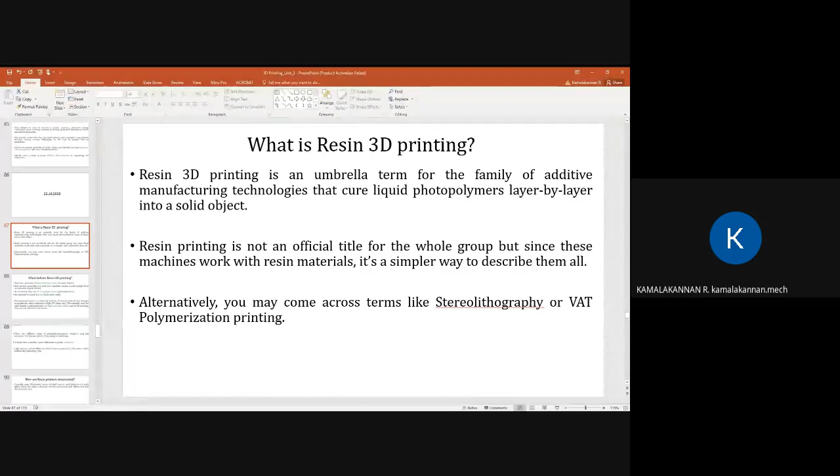So, boys, today our class is about resin. We have seen what materials we are using in 3D printers and also how those materials are prepared for making a product in 3D printing. So far, material-wise, we have seen polymers, we have seen metals, non-metal in the form of resin. Next, we have seen ceramics. So these are the things we have seen

in preparation of metal and preparation of material powders in the form of polymers and metals. The third thing is resin, which will come under, I'm sorry, non-metal. Resin is one of the important types of material used in 3D printing because there are many companies available that prefer making 3D printers only with resin.

It cannot be used even for polymers or other technologies. There are companies which specially make 3D printers only for resin. So it shows how much resin plays a vital role in 3D printing material. That is why I have planned a class for resin today. We have seen resin a few days back, and I have given a few points, but today we are going to see only about resin.

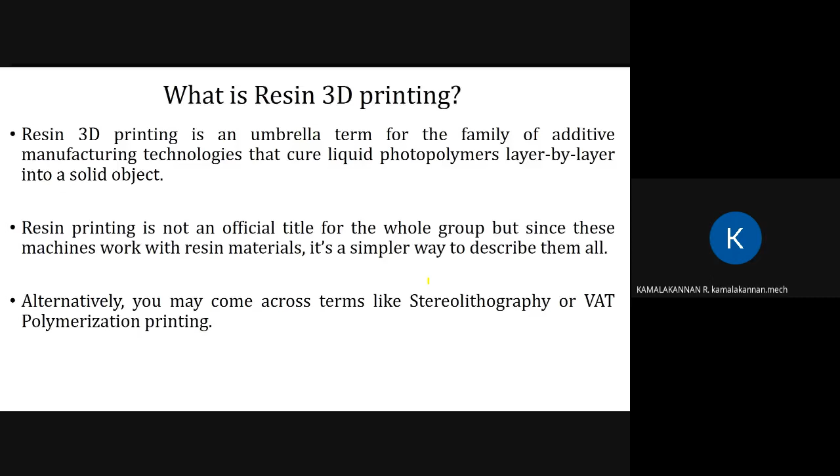We use the word vat here because of the polymer material. This type of polymer material is stored in a vat. That is why they call it vat polymerization. What defines resin 3D printing? When will we call it resin 3D printing? Of course, when we use resin for making a product, it will be called resin 3D printing. Then how can we define that?

The thing is, they use the principle of photopolymerization to create objects. It shows that there are other types of polymers which you can make with other techniques to form a solid. Here in resin, we use photopolymerization. Here you use light-sensitive material, so it is called photopolymerization.

Okay, guys. In other types of 3D printing machines, we use the polymerization method, but that will be in the form of heat or pressure or both. But here we are using light. Hence, when you have the principle of photopolymerization, it is also called resin 3D printing. And the next one is they operate according to the code. This is a general way of explanation.

And as a material, they use UV or daylight resins. So for photopolymerization to happen, we have to use UV or laser, or else daylight, sunlight, might be used for photopolymerization. Then the material is stored in a vat, that is nothing but a bath or resin tank.

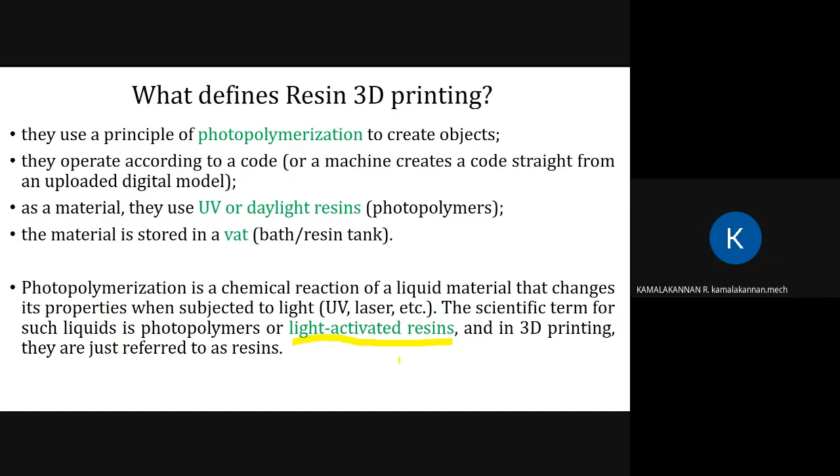See, officially it will be called photopolymers. Sometimes it is also called light-activated resins. That is the actual term, a technical term. It shows that it will activate under a light. Why it activates under light is, when you have a liquid resin and a different wavelength of light passes over it, it starts polymerization. That is why it is called photopolymerization.

In general, it will be called light sensitive material, light-activated resins. Because resin is a general word. There are many types of resins, from natural to synthetic. Here, what we are using is light-activated resin.

This resin has many types. Each resin will not get solidified in a single light. Some resins will get solidified or photopolymerized in UV light. Some will photopolymerize in laser. Some in daylight, that is sunlight. Some even in LCD projector light, which is enough to start polymerization. So it depends upon the type.

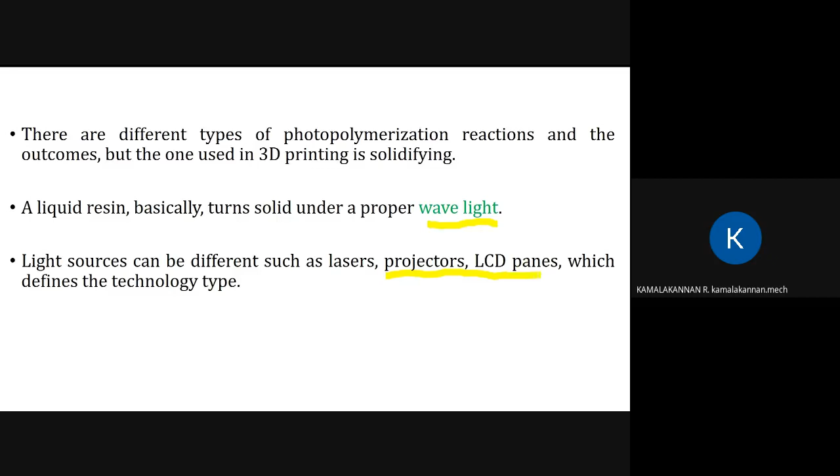Next one, how are resin printers constructed? As we have seen what photopolymerization is and how we define a 3D printer, the same way, how are resin printers constructed. The major parts of resin printers are the light source and build platform. The build platform will have a top-down approach or bottom-up approach. Both cannot happen in a single construction. Whichever you want, you can prefer. It depends upon the type of product you are going to make.

It also has a resin tank to store it, which is nothing but a vat. It will have mirrors to focus the laser light or UV light towards the area wherever we need.

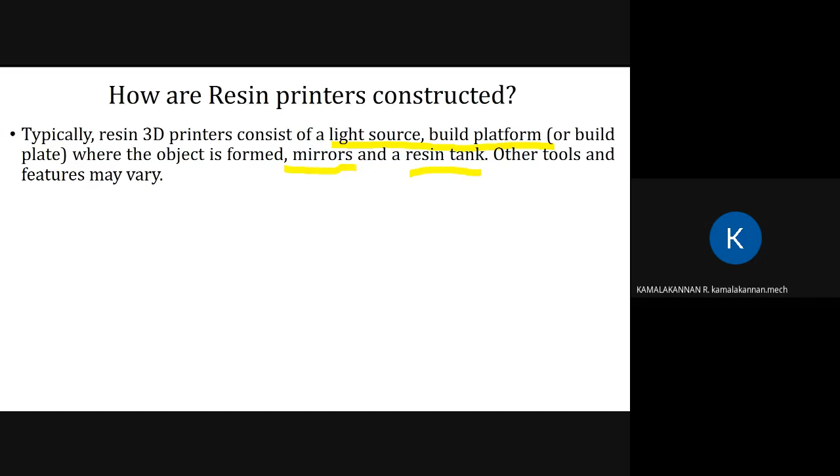Next one is how resin printers form an object. In a simple way, we can say it is by the process, and the process is nothing but photopolymerization. Normally, we will use the upside down approach, because it's tough to control the bottom to top approach when you compare with top to bottom, so companies always prefer upside down. We can control it easily and we can go for a huge product. When you go for a bottom to top approach, you need strong or more support. To reduce that, we can go for upside down.

Upside down is more common for desktop machines because it's easier to operate and fabricate without losing out on quality. The quality differs because when you have many supports in the bottom to top approach, you need proper finishing. If proper finishing does not happen, the quality of the product may vary. That is why they have indicated it here.

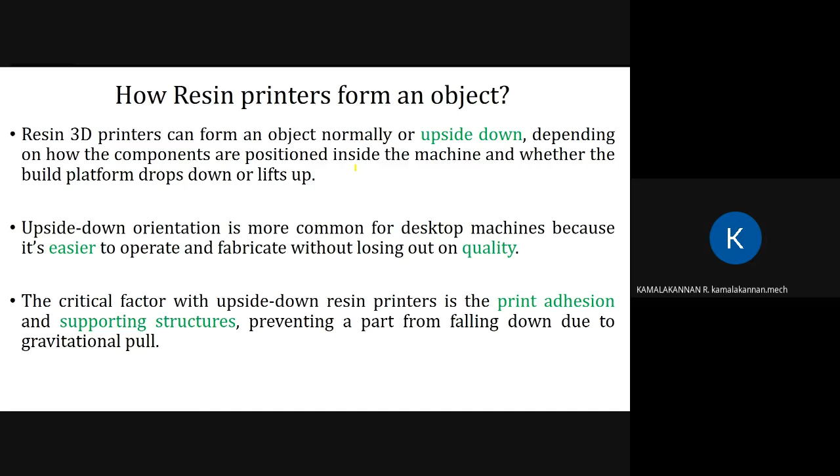Next one is how does resin 3D printing work? The working is, as we studied in the second unit, the common approach. In the vat, the photo resin will be filled. Then UV light will pass through the required area, and the layer will get solidified. After that, the build platform will move downwards. That is what is called upside down. The downward movement depends upon the layer thickness. Then the same process will repeat. Laser light or UV will pass over the area which needs to be solidified, and it will be repeated. Finally we will get the resin 3D product.

So here we have indicated a word called toxic. Why? Because there are also types which will be in toxic conditions. So try to avoid these types of materials, or else the product should be made in a properly closed condition or with preventive care.

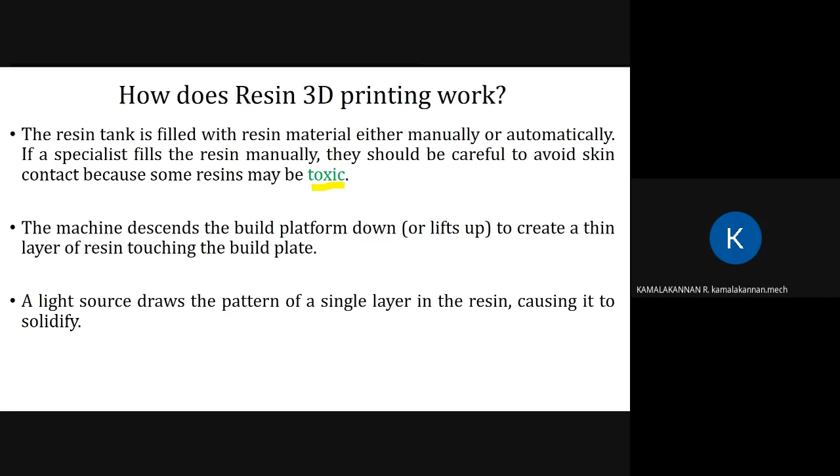So in general, what types of post processing can we do to have a proper 3D print of resin? The first one is washing. Washing is nothing but, as we have seen, there are some resins that can be washed away with ordinary water, and some with chemicals like limonene. So it depends upon the type of polymers we are using, that is, the photopolymer we are using.

It is needed to remove uncured resins left over from a print. In order to do so, prints are put into alcohol, water, or at least left to dry on some paper towel. So washing is nothing but removing the uncured resins. Even though we are curing with the help of light, there might be small areas which are left uncured. They have to be washed away for proper post processing. So this will be put in water, alcohol, limonene, or any other chemical to wash away unwanted or uncured resins.

Next one is UV curing. UV curing is nothing but, after the washing is over, it will be kept in UV for further cure, because the machine might have done the work very fast. There might not be a full curing. The material might be considered as a raw material. To have good strength and for using that product in a live area, we have to do proper curing. So you will have a UV curing a second time after your building. This will be a common process in resin. Sometimes the material might cure too much when you expose it directly to sunlight. To avoid such, we will use UV curing.

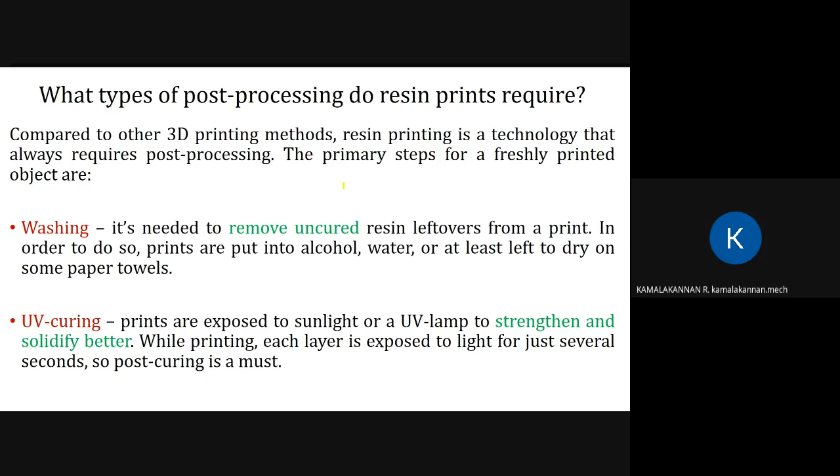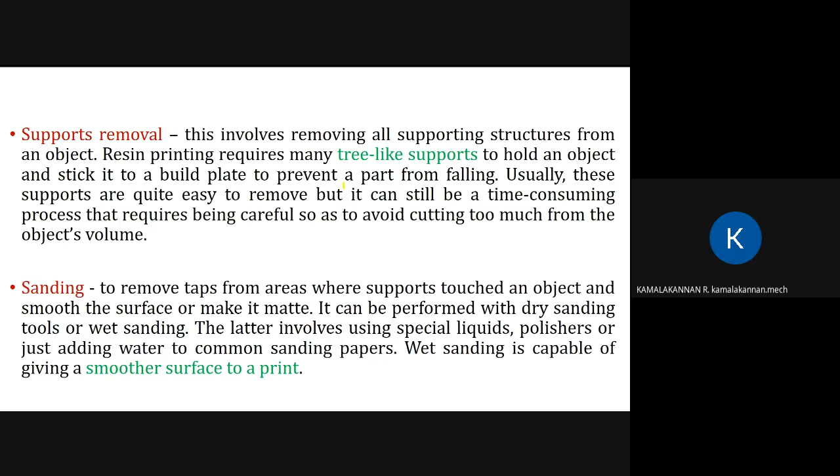Next one is support removal. Yes, of course, we need to remove the supports. Depending upon the product, the size of support will vary. It will usually not be a single stem-like structure. It will be a tree-like structure, so it has to be removed properly. The next one is sanding. Sanding is nothing but, just consider it as sandpaper. Once you remove the supports, there will be a print left in the area where the supports were. So it will look awkward. To avoid such, we will use a fine sandpaper to rub over the surface to have a good smooth finish.

Next one is patching escape holes. This is especially for a hollow product. When you make a hollow product, inside that there will be liquid resin. To let that escape, we should have escape holes. Finally, once it escapes, we have to patch that hole. That is called patching escape holes. We will use some photopolymer itself to patch the escape hole.

Next one is finishing. Finishing means the overall finish. Overall, if you are seeing any imperfection, you have to fix it. It might be you have to do sanding, or proper curing, or a wash away, whatever it may be. Overall, if you want, you may repeat.

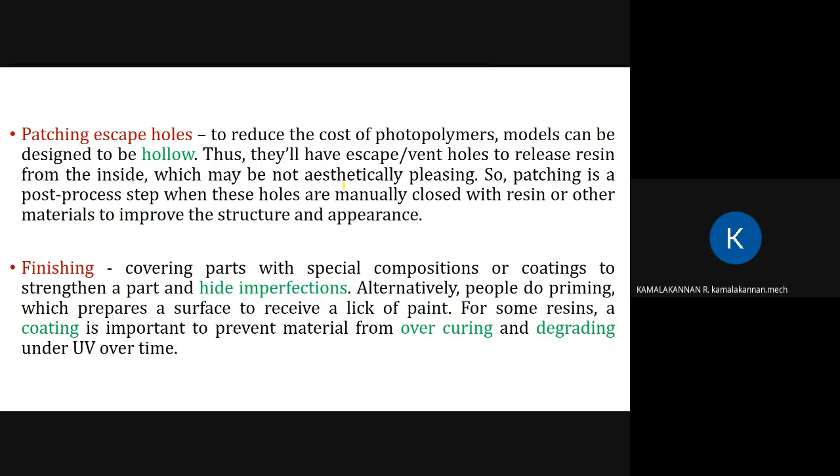An important thing you have to note down is that for some resins, a coating is necessary once the above work is over in post processing. That is, once washing, UV curing, support removal, and sanding are over, we have to do a finishing called coating. A coating is nothing but a material which will prevent the photo material from over curing and degrading under sunlight or UV over a certain period of time. That is why finishing is necessary.

Then painting: there are many colors available, many compositions available. You can choose which color you want. It is for aesthetics. The next one is polishing. Polishing is done to have a very smooth and clear surface. It will give you a glossy finish, a surface with a highly reflective finish, which will look very attractive. That is why this post processing is done in resin. These are some of the post processing methods.

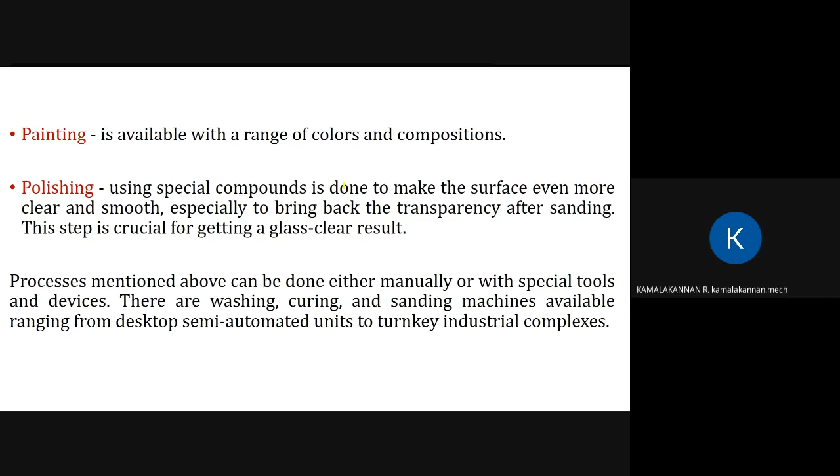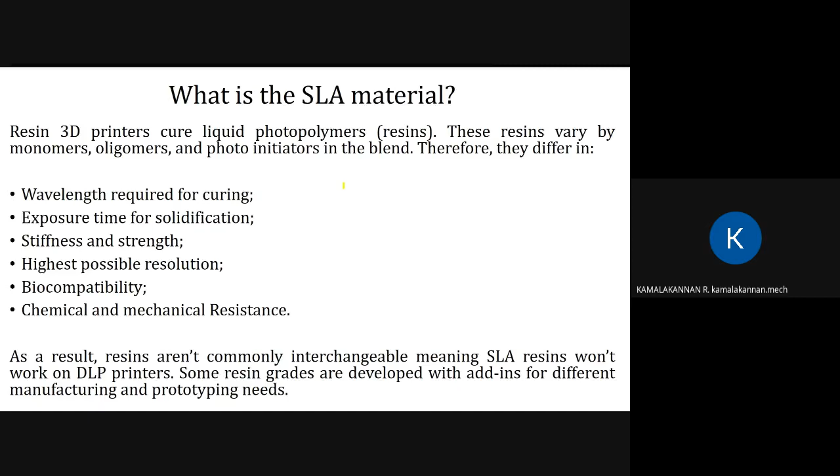Next one, what is SLA material? Why we call it SLA material is that in SLA, stereolithography, the only material we use is resin. That is why we call it SLA material.

You will see some common UV resin types in 3D printing. First one is standard resin. We will call it as resin. It's a common one. This resin uses UV light to get photopolymerized. The surface structure might look like a rubbery texture, but actually it is very strong when compared to other types of resin.

And this type of standard resin is most sensitive to UV light, so the first time itself you have to cure properly and do proper post-processing, or else overcured areas will form while in use. To avoid such, you have to do a proper coating.

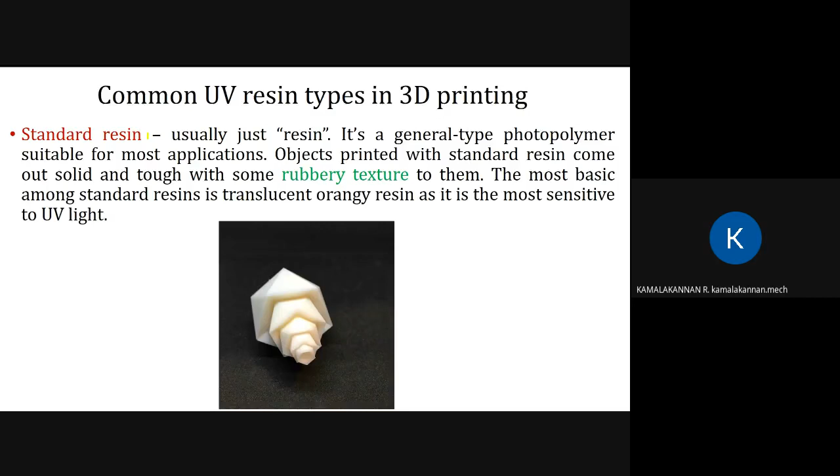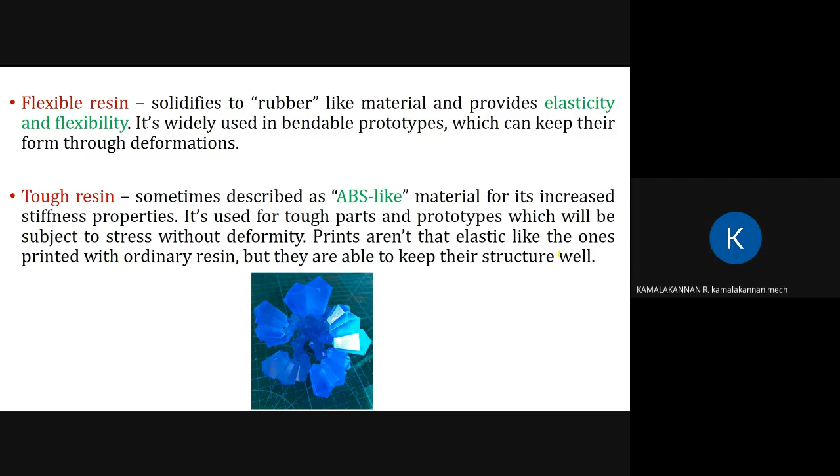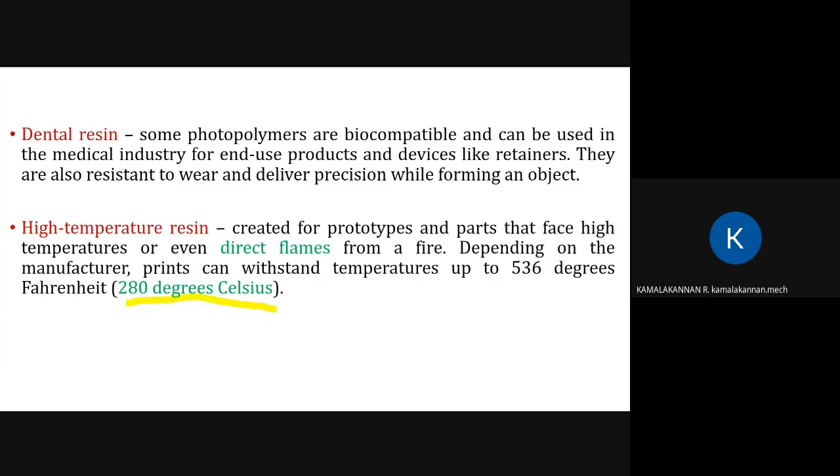Next one is castable resin. Castable means it is for casting purposes, especially investment casting. As you know, investment casting is done with the help of wax to achieve small products with very fine finishing. Similarly, castable resins are used, and the same casting concept can be used here.

Ceramic resins are also available. This is done by adding ceramic to the resin. This type of resin will give you more stability and rigidity, and it can withstand even high temperatures. That is why we use ceramic resin. But the thing is, because of high rigidity, it will break easily, so you have to be careful when using ceramic resin.

Next one is clear resin. Clear resin is nothing but very transparent in condition, like glass. It is very transparent, easy to use, and even in some dark conditions it can behave like a very transparent condition.

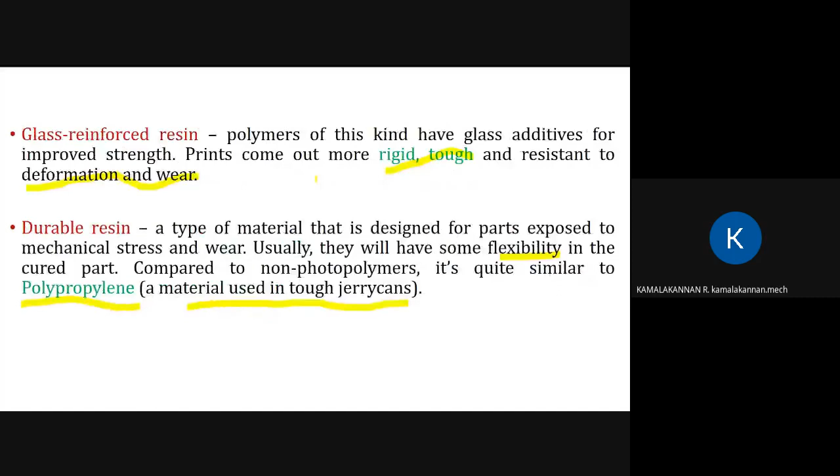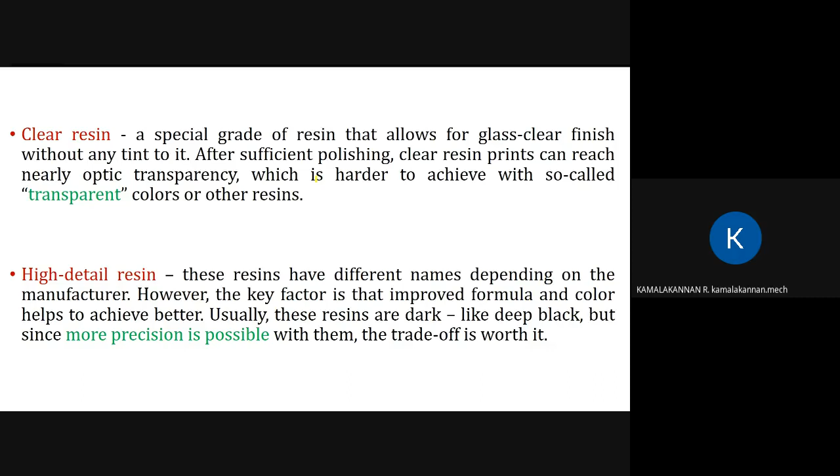Next, how many resins have we seen? 1, 2, 3, 4, 5, 6, 7, 8, 9, 10, 11, 12 resins we have seen. In the earlier class, while taking resin, I showed only 7 resins, but today I told you about 12 resins. So these are the resins, not more than this. Only 12 resins are mostly used in 3D printers. Even though some resins are shown here, their usage is much less compared to other types of resin because of their cost and the condition of how we use them. So it depends upon the situation.

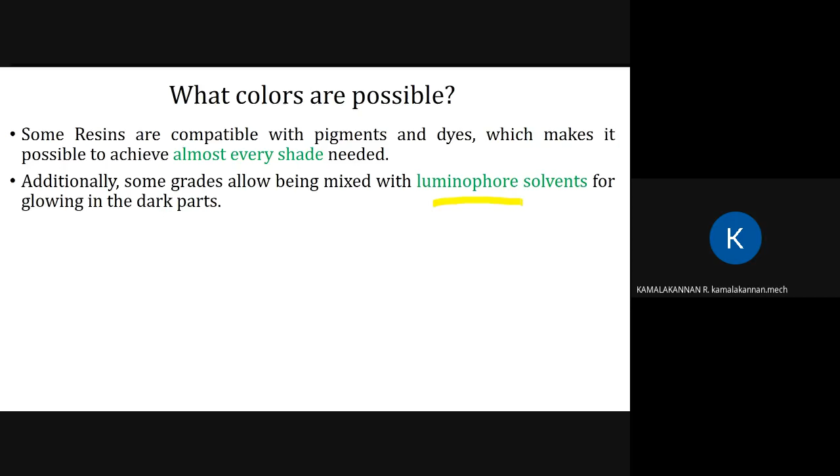Then what colors are available? Almost all colors are available. Any color is possible in resin. Even luminophore solvents are also added, so you can get a luminous color also achieved. That is nothing but it will glow even in the dark. We generally call it radium. This is also possible when you add luminophore solvents.

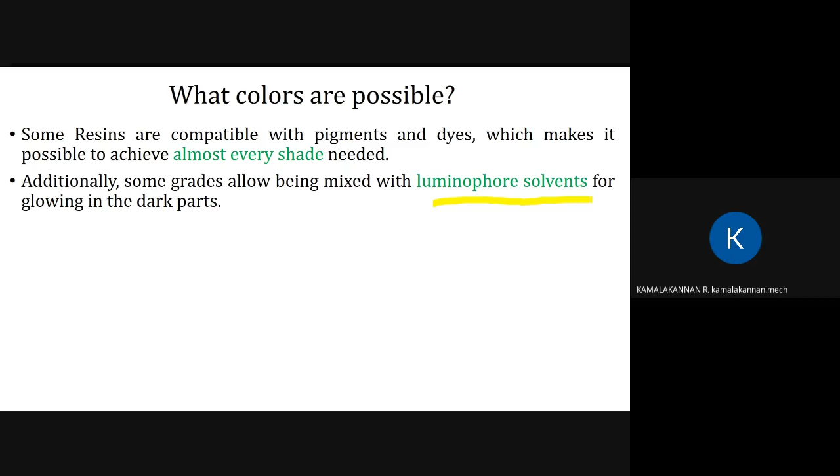What are the advantages and limitations of resin 3D printing? We have to know the advantages of using resin. It is liquid in condition, after it gets solidified it becomes solid, so that you can get very high detail compared to any other type of material. So when you choose resin for making a product, it will have very good detail. You will have a very smooth surface finish.

Third one is wide variety of materials. Yes, when you take a polymer or a metal, you have a wide variety of materials available, you have a choice. But the thing is they will have similar conditions, similar characteristics. Here, the resins range from very smooth to very strong and transparent, even at very high temperature we can use them. That is how much variety we have in resin, and that is why it is considered one of the biggest advantages of using resin.

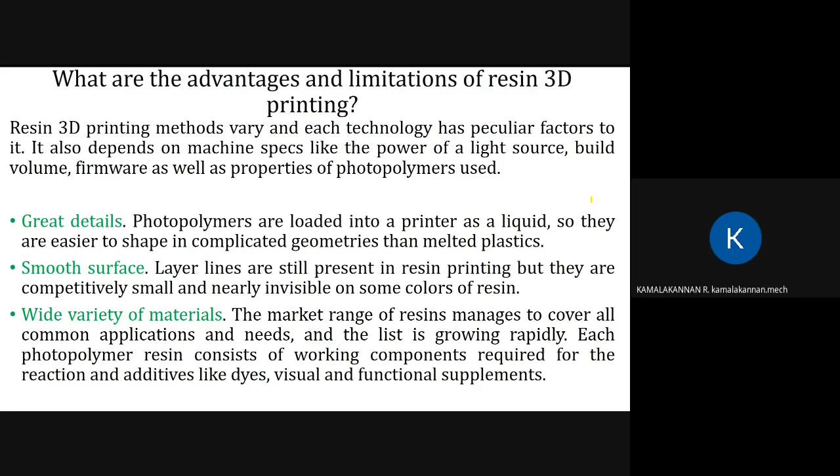Support doesn't affect the surface that much. Yes, of course, when you have support, in resin you have to use more support, but that support can be easily removed. When you have more support in metal or other types, it's tough to remove, you need to spend more effort. When you use resin, it is easy to remove, so even after removal of the support, the surface doesn't get affected that much because it's easy to rub and easy to polish. That is why it doesn't ruin the surface that much.

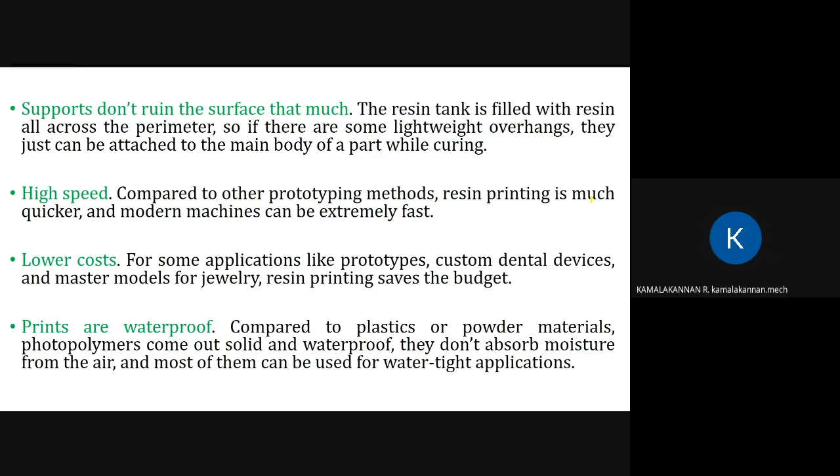Using this material, we can make it high speed compared to metal. It is low cost. The prints are waterproof. Yes, since it is a polymer, it is also waterproof. When you take metal, not all metals are waterproof, some materials will get affected by water. That is why we say the prints are waterproof.

Of course, it will have disadvantages like other materials. Many machines have a small build volume. By using this resin, we cannot make a huge product. Its withstanding pressure and temperature ability is not like metals. So this type of resin is used only for making small products, hence the machine will be smaller in condition.

Design limits and requirements. Since these materials are rigid in condition, when you compare with metals, it's not the same as metal. So to achieve something nearer, you need to have more support. There should be a proper design to achieve this.

Engraved details should be at least 0.4 mm wide and thick. It is not the same as metal - in metal, you may have even thinner details. That is why the design limit is higher compared to metals.

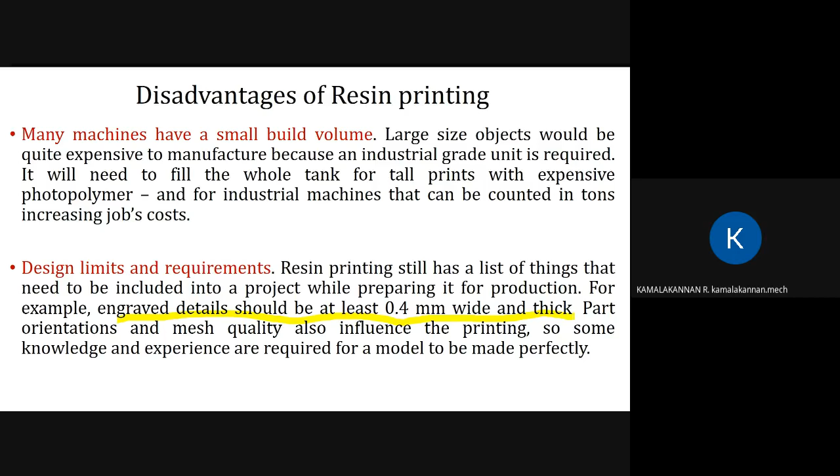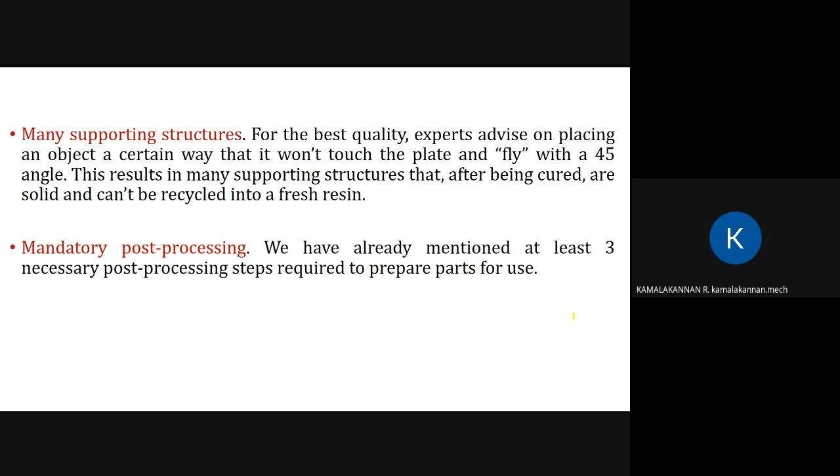Mandatory post processing: once the supports are removed, it has to be finished. Sometimes some resins will cure too much when exposed to light after using the product. To avoid this, we do a coating of paint. That is why post processing is mandatory. Almost all types of material used in 3D printing need post processing.

Curing keeps running after the printing. Some material will keep on curing even after it is taken out from the printer. Even after certain months or years, it will cure slowly day by day. We cannot stop it.

Its cost is a little bit higher, but it is affordable compared to its characteristics and usage. It is affordable, but when you compare it with polymers, it is costlier.

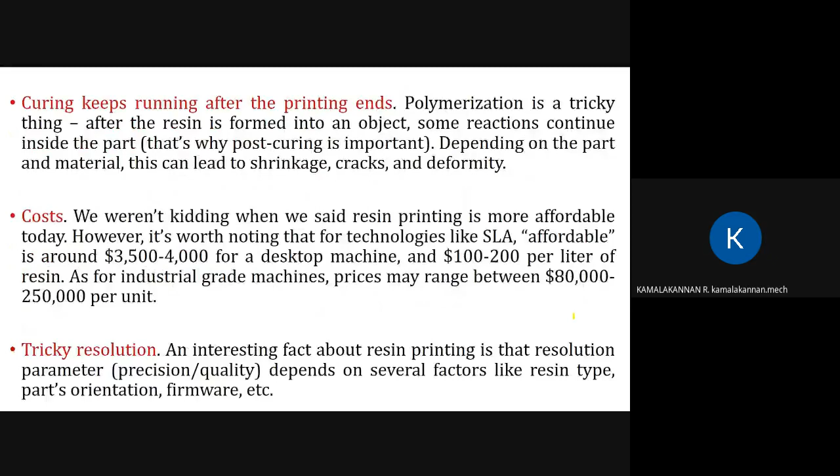And tricky resolutions - if you need a design, if you have design limits, of course you will have proper parameters that you have to maintain.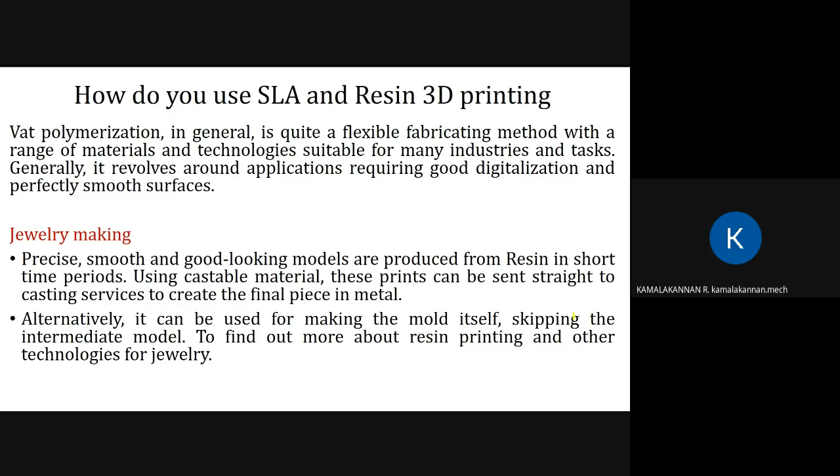This type of design cannot be made within casting. It can be achieved only through investment casting or resin type material. When you choose resin, the design limitation is very low for making jewelry. In other parts it has design limitations, but for jewelry, since parts are smaller, the design limitation is lesser. It is the best source for jewelry making.

Next one, dentistry. There are resins we have seen which have high chemical resistance, which we can use for dentistry. It also has the property of less wear and tear, good chemical resistance, and precision can be achieved. It can be used in dentistry.

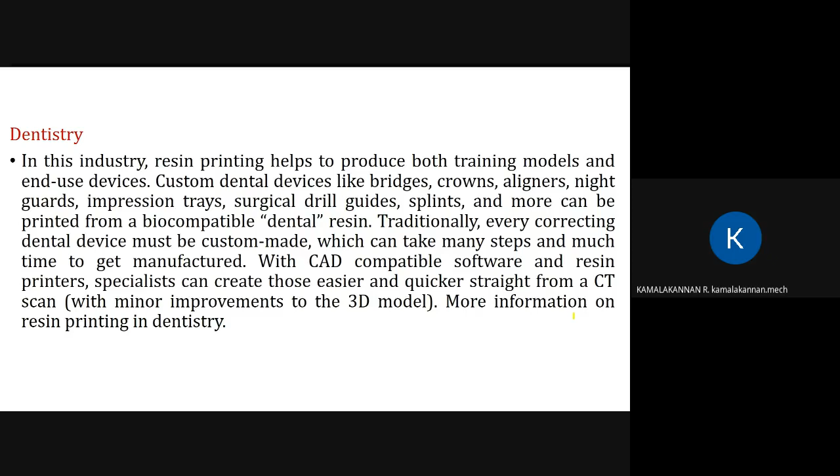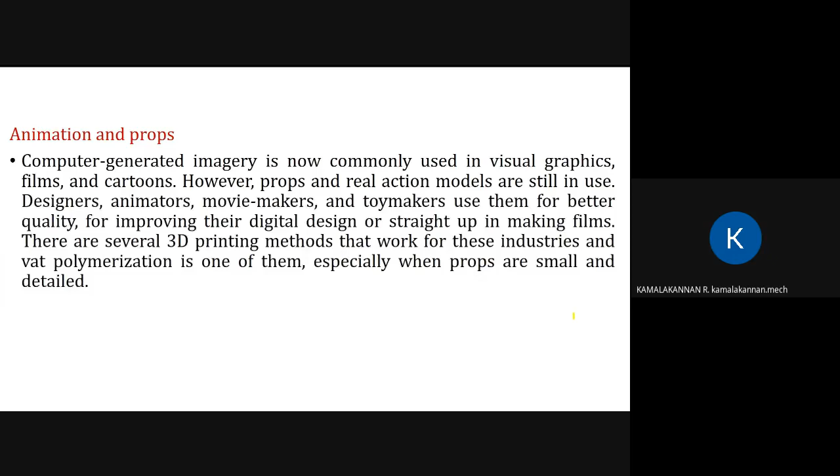Next one is animation - movie makers and toy makers can use it better for improving quality. Next one is miniatures - when you have a home 3D printer, you can make miniatures.

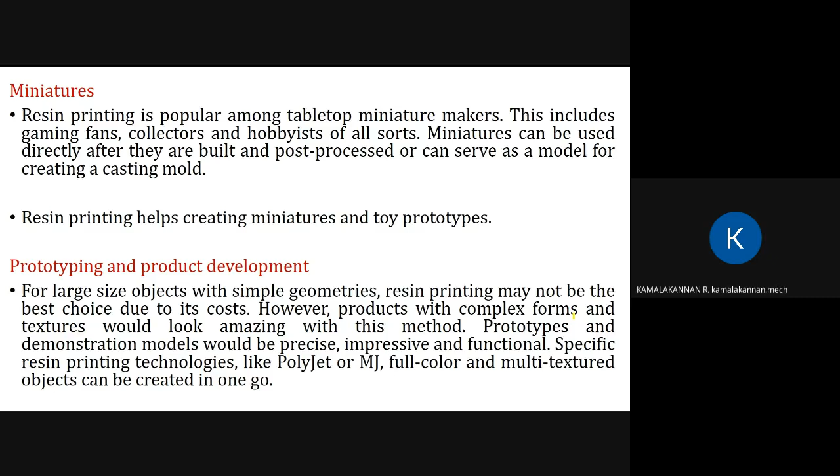Next one is prototyping and product development. Using resin in prototyping is a good option because it's easy to make, low cost, and even intricate shapes can be done easily. That is why choosing resin for making a prototype is a good option here.

Next, what different resin printing technologies are available? SLA - stereolithography. Second one is MSLA - masked stereolithography. DLP - digital light processing. DUP - direct UV processing. CLIP - continuous liquid interface production. Polyjet or multijet printing. These are the technologies which use resin as an input.

We have seen only SLA in our syllabus - SLA and polyjet, I think. These are the two things covered in our syllabus, but there are other technologies: DLP, DUP, CLIP, MJP. These technologies have been developed over the last 20 years and have been very successful commercially because of their properties and conditions.